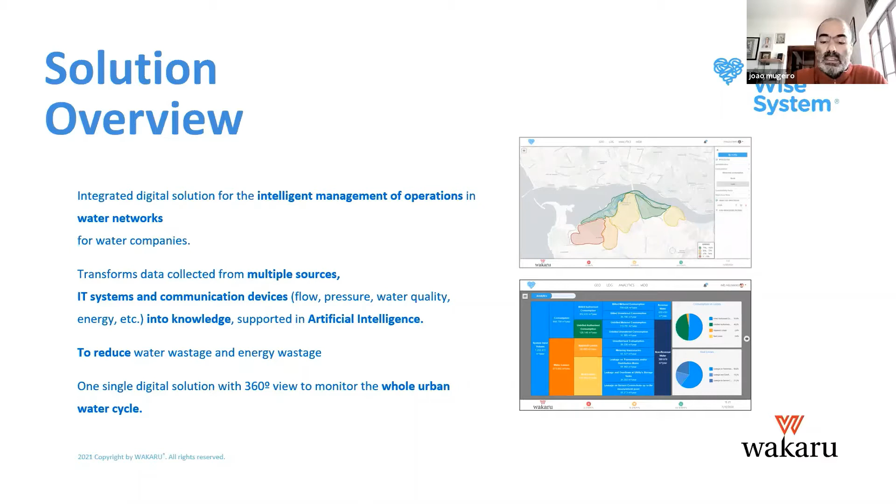Well supported in artificial intelligence, it transforms data into knowledge, generating events and identifying the abnormal ones, giving the water company an integrated vision of the urban water cycle from abstraction up to distribution, and down to the treated water wasted usage, either reuse or delivering it to the environment. Next slide please.

With the water-wise system, water companies will successfully overcome two of five Ofwat challenges. One, responding and adapting to climate change, including how to meet the sector's ambition of net zero emissions, by monitoring energy consumption and equipment's best operation, monitoring the whole urban water cycle.

Sorry, can we go to the previous one? Okay, and understanding long-term operational resilience and infrastructure risks to customers and the environment, finding solutions to mitigate these in sustainable and efficient ways.

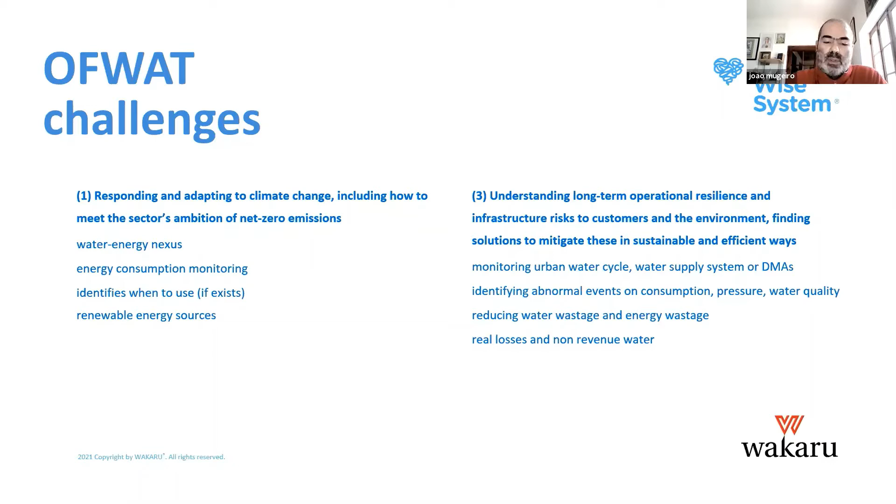And how? Well, by monitoring the whole water urban cycle, identifying abnormal events with predictive models, and reducing leakage, non-revenue water, and extending assets' lifetime. We could go to the next one now, please.

But it's not a single solution, as most of the competition or competitors, but a complete offering. It gives water companies a 360 degree view of the whole urban water cycle. It has probably the broadest scope of the most innovative solutions for water networks management, addressing the water-energy nexus.

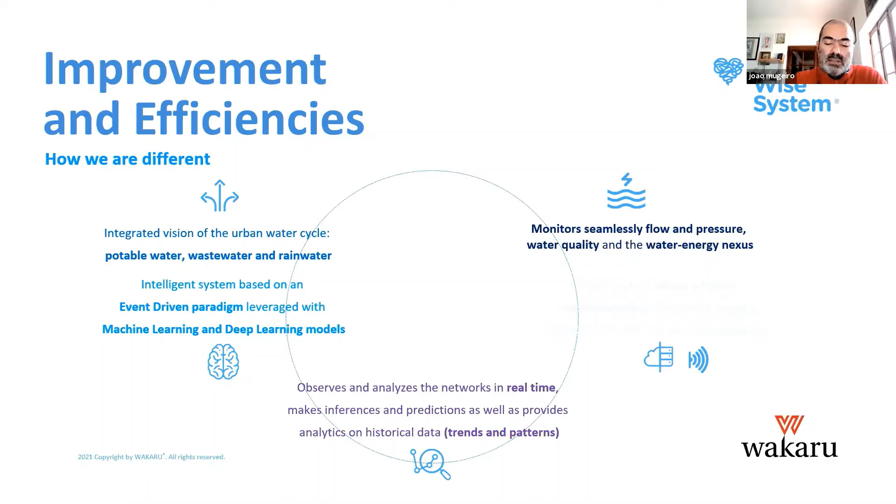Potable water, wastewater, rainwater, flow, pressure, water quality, energy consumption, renewable energies, event-driven artificial intelligence, hybrid implementation, real-time inferences and predictions, better than a Hogwarts wizard. Let's go to the next one.

So this is very important when we are talking, as we've heard this morning from Anglian Water, with a highly regulated sector as it is in England and Wales. And of course, as we are saying, a very important differentiation on this digital solution is the energy consumption, the water-energy nexus. Next slide please.

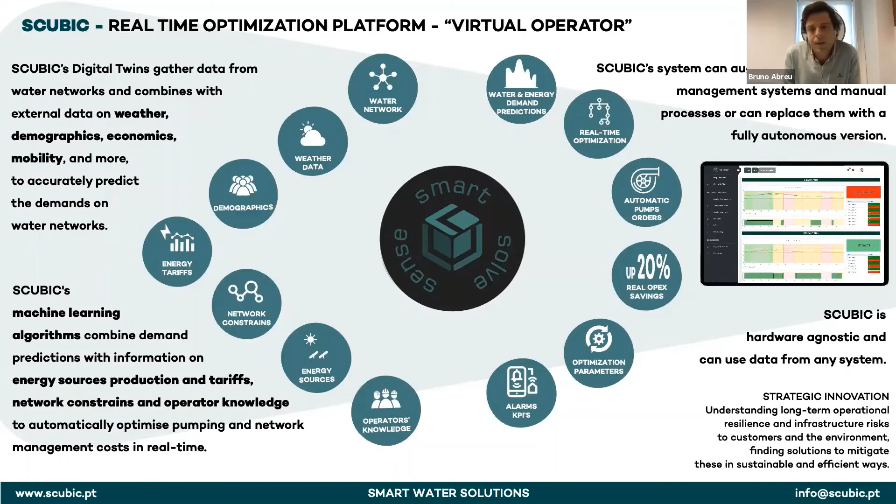So Scubic helps water utilities achieve their zero carbon goals, reduce water and energy wastage, and helps reduce the loss of knowledge due to the aging workforce that is happening all over water utilities in Europe. With Scubic, we increase water quality and network security. And since we lower energy costs and emissions, our platform has a very fast return on investment.

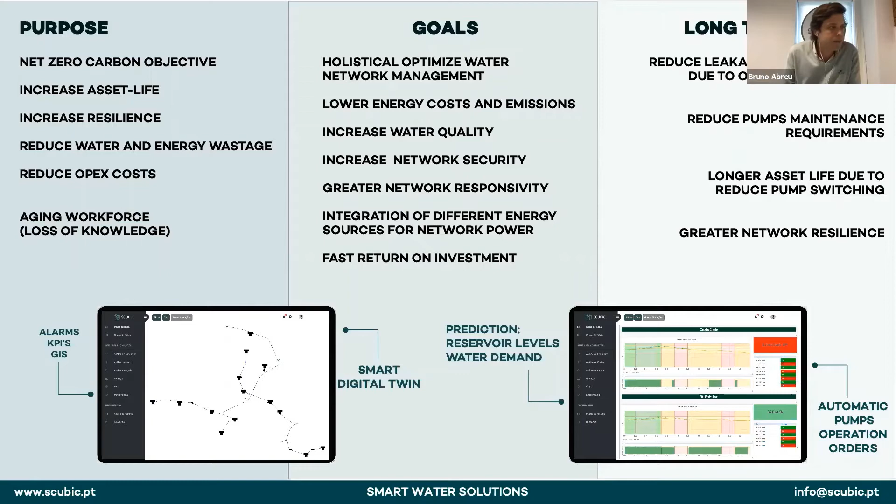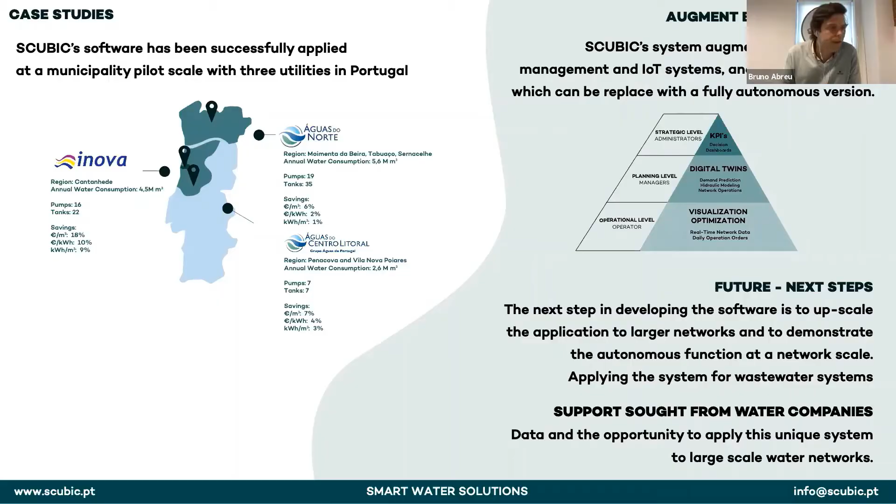So we have applied Scubic on small municipalities, and we are reaching reductions up to 18% on their energy costs, which is really amazing. But I have to stress that Scubic is not an IoT or network management system. Scubic augments these systems, and many manual processes can be replaced with fully autonomous modules. For the near future, we will scale up the Scubic solution for larger water networks and demonstrate the autonomous modules working. Therefore, we are looking for water companies that can give us access to data and apply this unique system at a large scale network. So thank you very much for your attention, and I hope to optimize your network operation very, very soon. Thank you.

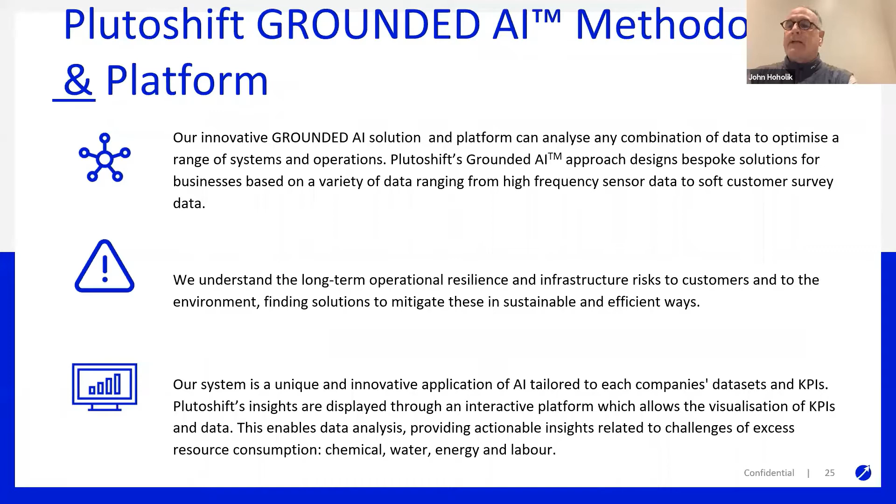Relative to how we can make contributions, it's really in the areas of better data analysis, optimized resources, optimized systems. With our platform and approach, we bring immediate day-to-day value to an organization. We don't try to boil the ocean per se, and really understand the functional aspects of what it takes to operate differently. Within that, we really feel we help drive positive behavior change within an operation to make sure that it actually progresses and achieves its goals.

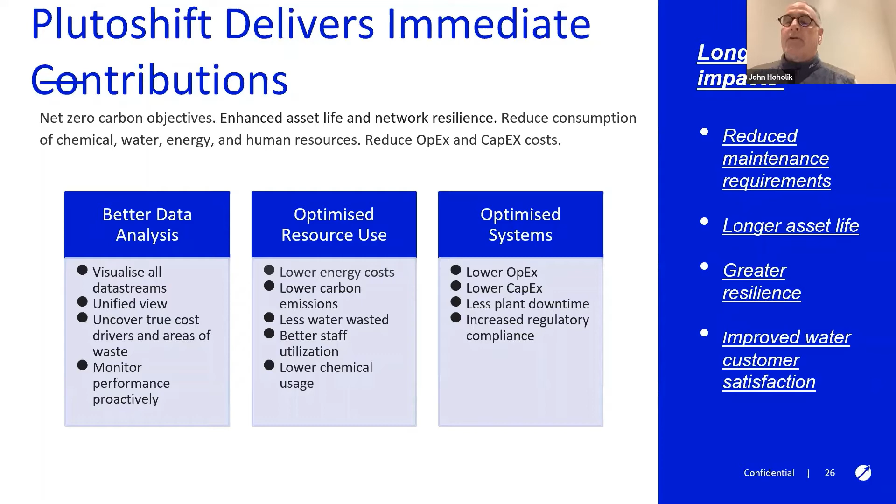When we look at what we do, it's really about the opportunities put forth through this organization on how we can help water utilities make more out of what they do across the various assets and processes. We do have demonstrated results where everything we do is backed by a defined ROI, and within these sample case studies, we're driving impacts that would be of great benefit to a water utility.

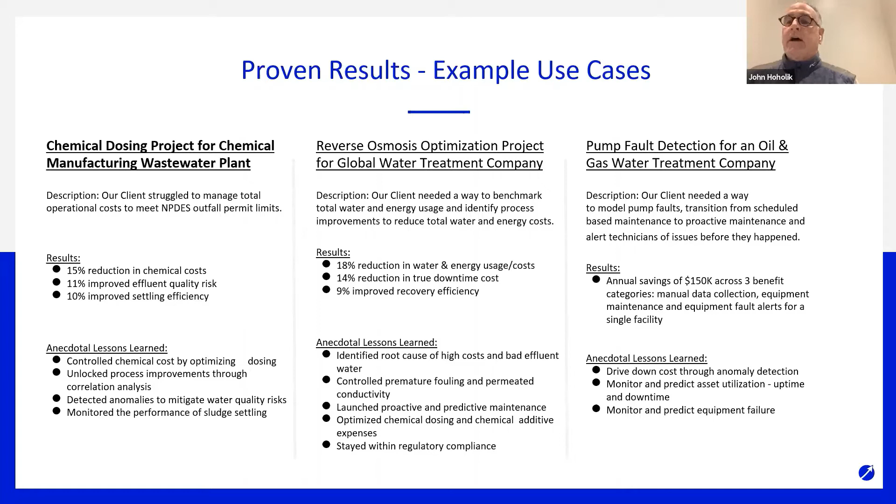Also, I think we're getting a lot of visibility due to our thought leadership on the topic of grounded AI and how to implement it. A little bit more about our market recognition, and then last slide, please.

Really, what we're seeking from a partner is how to holistically assess its business processes. We could really help analyze and optimize existing data investments, improve performance and regulatory compliance, achieve cost and resource efficiencies, and then enhance performance of frontline and remote workers. What we need is access to a water utility from the perspective of gaining their data. Through gaining their data, we're able to come back and provide exact areas that our platform can be of value to them. That's the end of my presentation, thank you very much for the time.

That was great, John, thank you very much, and perfect timing again there. So everybody's doing extremely well. You have already answered the first half of the question that I've asked the other participants today. I think the area that you could perhaps add a little bit more detail to is: if you are able to gain a successful partnership with one of the English or Welsh water companies or NAVs, how would this benefit the development of this solution in particular? Will it help you accelerate the development, accelerate the market entry? What are the specific things that you're hoping to achieve?

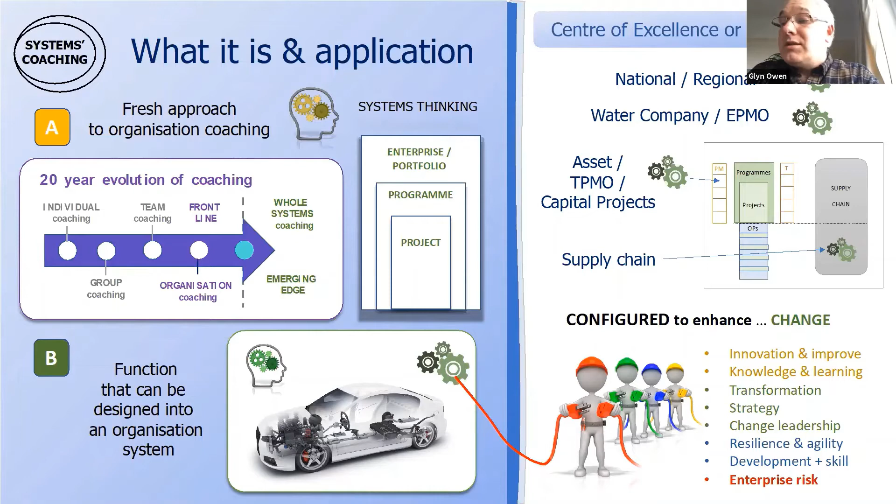So in the world of business, coaching has gained traction over the past 2 decades. Presently, at the emerging edge is a category called whole systems coaching. Systems coaching can be designed into an organisation as a function to enhance performance. In a similar manner, if a car requires more power or speed, a turbocharged system can be installed. Additionally, systems coaching can be configured in to enhance a variety of organisational aspects related to change, development and strategic value. As a function, it can be positioned in a PMO, Centre of Excellence, enterprise department, or even as a whole system network.

So systems coaching developed over 4 stages, each lasting about 5 years. Notably in stage 2, an early prototype achieved finalists at the UK National Business Awards in 2004. It operated within a top 10 contractor with AMP 3 and 4 strategic programmes with many water companies. Stage 3 was outside the sector, focused on whole system transformation. Stage 4 was concerned with a national water company in the Middle East undergoing rapid transformation, and also an award-winning regional integration pilot in the UK public sector. Finally, a book has just been published in December, capturing the blueprint of the approach.

So here's the thing. Matrix organisations are typically designed and best perform in a stable, predictable delivery environment, such as the AMP period of 5 years. However, they typically struggle with change and innovation, and when the environment becomes unstable, the organisational risks intensify considerably.

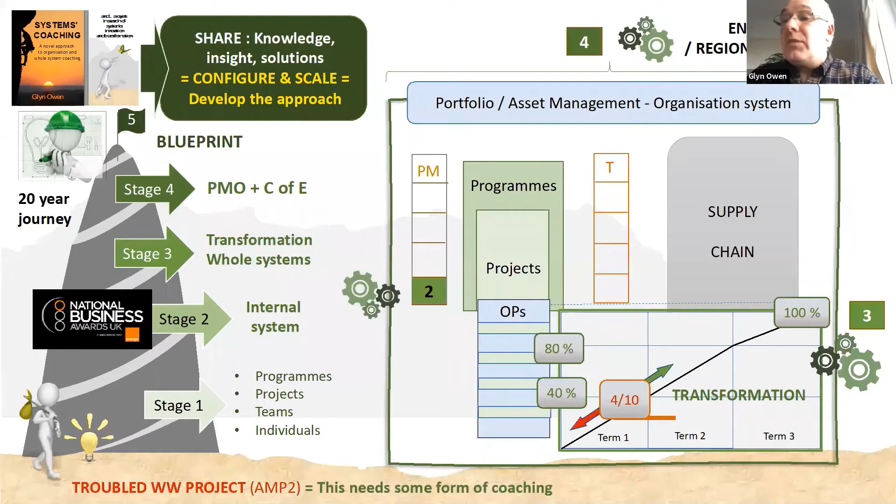So now in a post-COVID environment, as some agencies such as the World Economic Forum are urgently calling for a great economic and social reset, the volatility, uncertainty, complexity and ambiguity of the strategic operating environment is about to intensify. Rapid strategic and systemic pivoting may be the new normal. As an example, perhaps even questioning the viability and priorities of the AMP planning and delivery 5-year programme periods. These sort of issues fall into an enterprise or strategic risk management category that are by nature often difficult to spot and treat. This is because of the people, process, organisation and culture attributes relating to how we perceive and engage with problems and solutions.

Coaching, and in particular systems coaching, speaks to the dynamics and essence of these types of risks. So in summary, systems coaching may be considered as an upgrade for matrix organisations. Organisations that sit at the very foundation or core of a water or engineering-based company, together with the supply chains. My aspiration is to share knowledge, solutions and insights as quick, as wide and with as much impact as possible. I'd be delighted to collaborate with a water company or group of companies interested in leading a scale with impact strategy on behalf of the sector. So thank you for your attention, and if you'd like further information, you can contact me through my website.

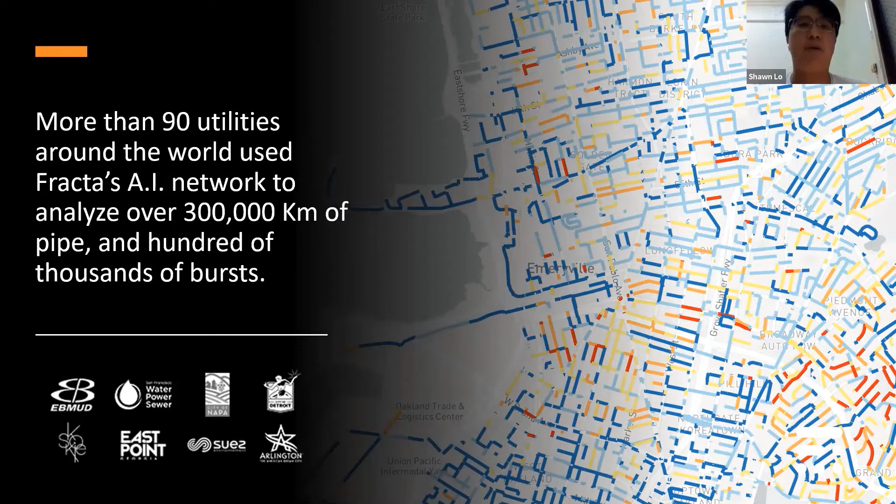Furthermore, our sophisticated data science team knows how to leverage AI across industries, such as wastewater, city gas, and railway. So here is the main part of my pitch today.

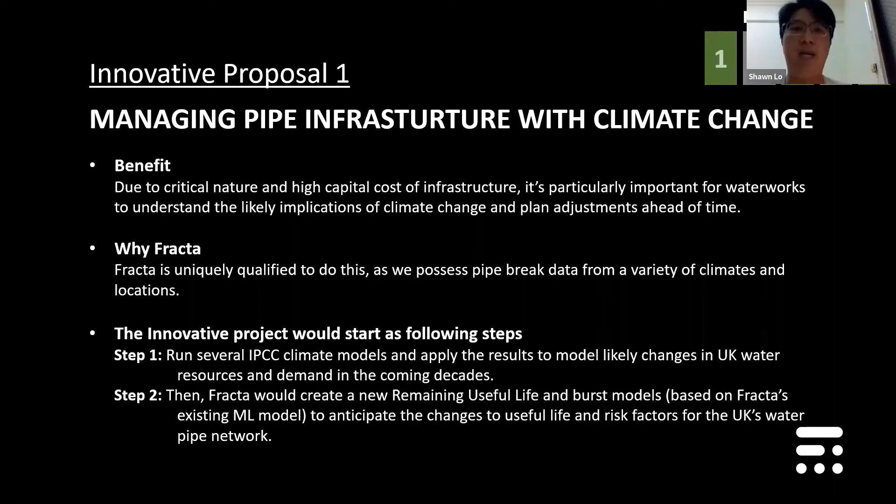Both proposals need your valuable knowledge and data to polish the idea and make the thing come true together. So let's share some details. For the first proposal, we focus on climate change and asset resilience by analyzing and delivering insight from the data, which we believe includes strategic innovation themes number 1, 3, and 5 — please check the upper right index on this slide. This proposal plans to include the IPCC climate change model to predict, first, how weather change will influence the useful life and risk factor for your pipe assets, and second, how to account for the impact of climate change on your capital investment plan. This proposal will benefit your long-term capital investment planning and make you more proactive on climate change.

So this is just two examples of our many proposals. Reach us for more options and details. Next, please.

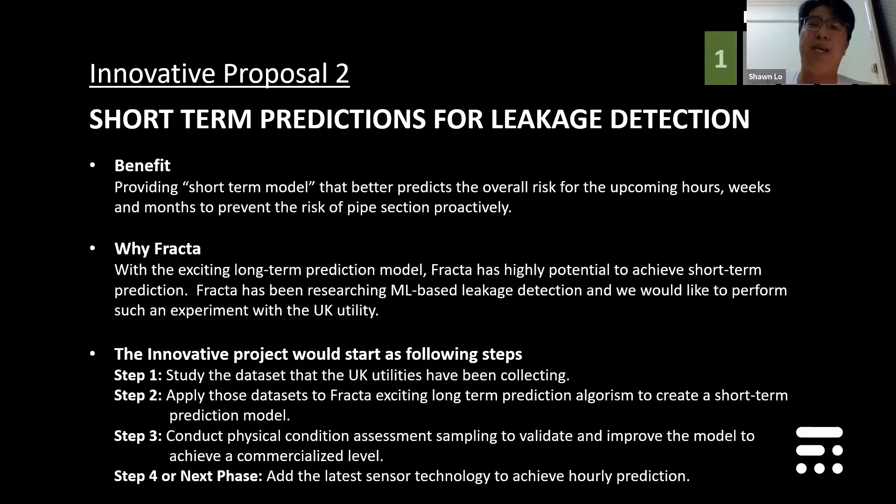So come partner with Fracta.

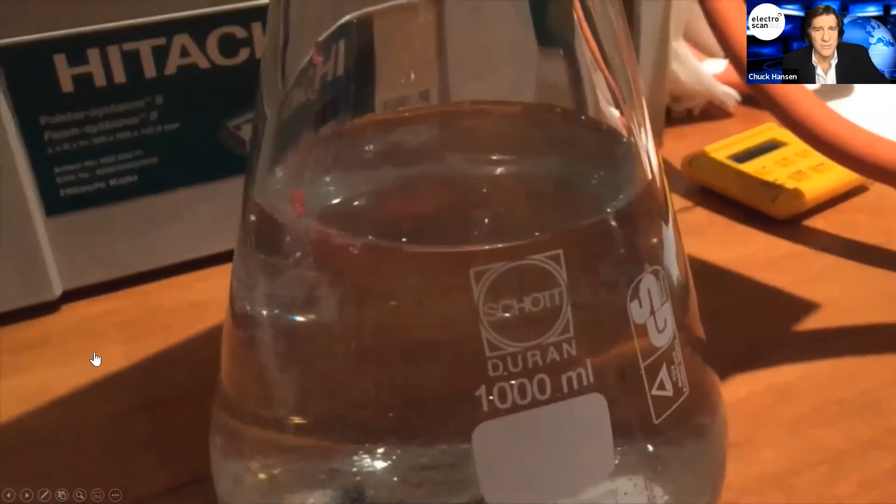Unfortunately, next slide, there's been no technology ever available to measure a full-length liner. And the information actually gets worse. Not only are we finding pipes that are being lined with cured in place pipe leaking, we actually may leak more after rehabilitation because of how we're reconnecting services.

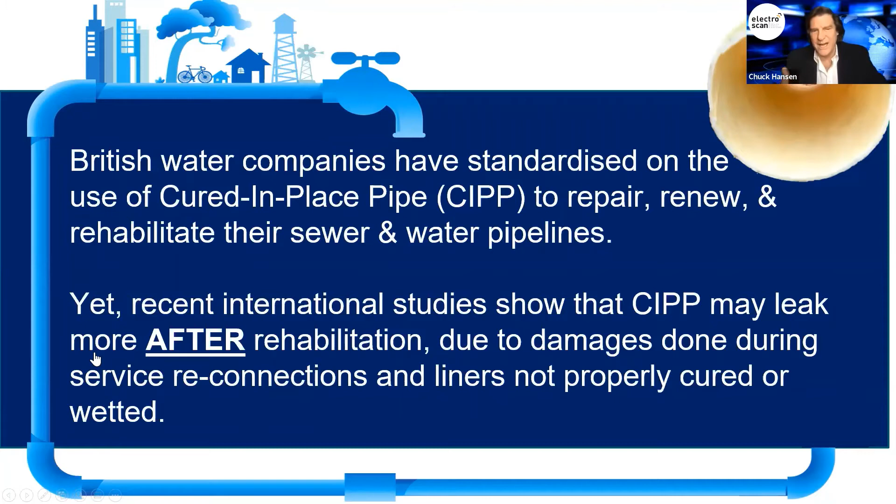Next slide. The examples are all over, and lining contractors really have known this for a long time, but we've given them a very easy technology bar. We've only used CCTV inspection.

Here's a pipe that you can actually see that if I put this through the example as well, I would have full leaks through it. CCTV won't find it. Next slide. Acoustics won't hear it. And even helium tracers won't find it as well.

Here's an example of a UV cured CIPP having cracks that a TV camera or an AI routine looking frame by frame would never see the permeability. Next slide.

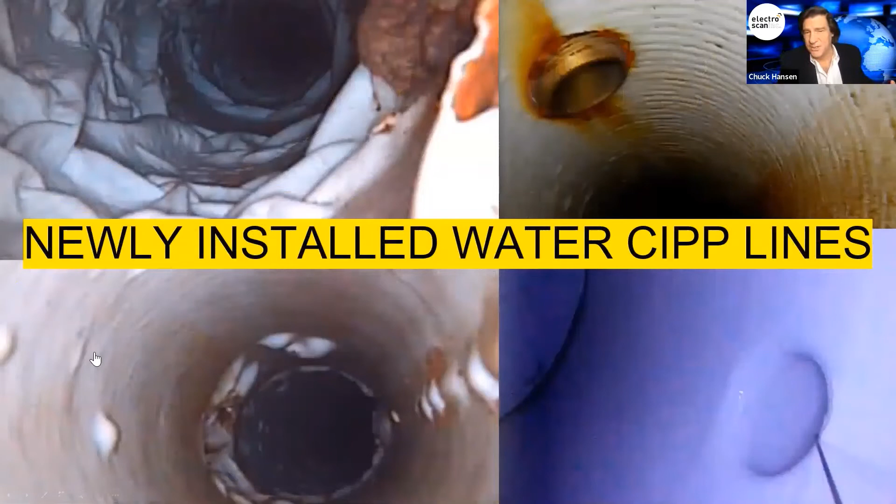The other problem is not only has this been used in the sewer business, we are now finding examples in the UK water market where CIPP is being used to line water pipes. And not only do they look bad, but we're finding massive leakage. Next slide.

It's the perfect storm, because when we assume that we fix a pipe, we assume we're not going to have the infiltration, not have the backups, not have the flooding in homes in recently lined areas in the UK. Next slide.

So what are we proposing? At the £250,000 mark, we're proposing to examine 25 kilometers of CIPP, having that information organized by supplier, by curing method, comparing it to the original CCTV that approved this pipe before. We want to also look at the flood risk, where we're lining pipes assuming we had 100% reduction in pipe, and we want to help come up with new acceptance standards. Next slide.

Some of you may know we recently won the November Water Dragons event. You see some of the water utilities that were judges. Next slide. Earlier this month, we also were selected as the leak detection solution of the year. Again, not acoustic, not video, and not tracing. Next slide.

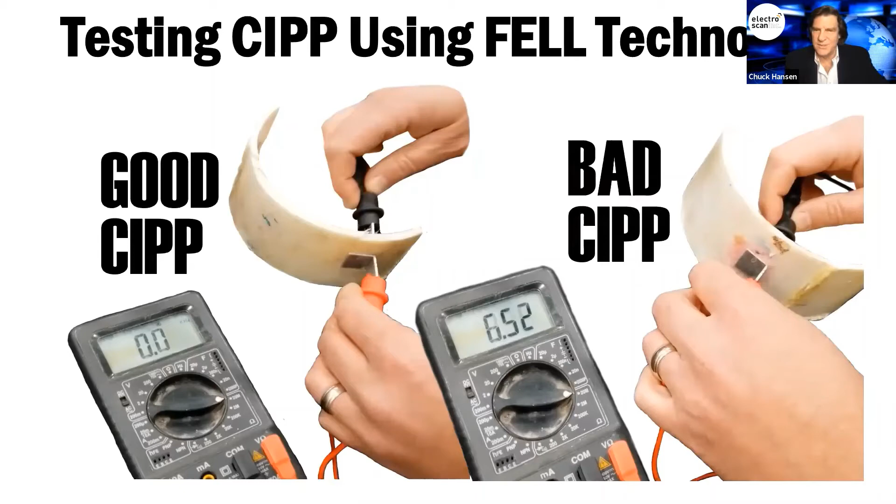So again, helping agencies know good CIPP versus bad, we brought a new technology, and we've been tested by the leading CIPP experts to come and help with that.

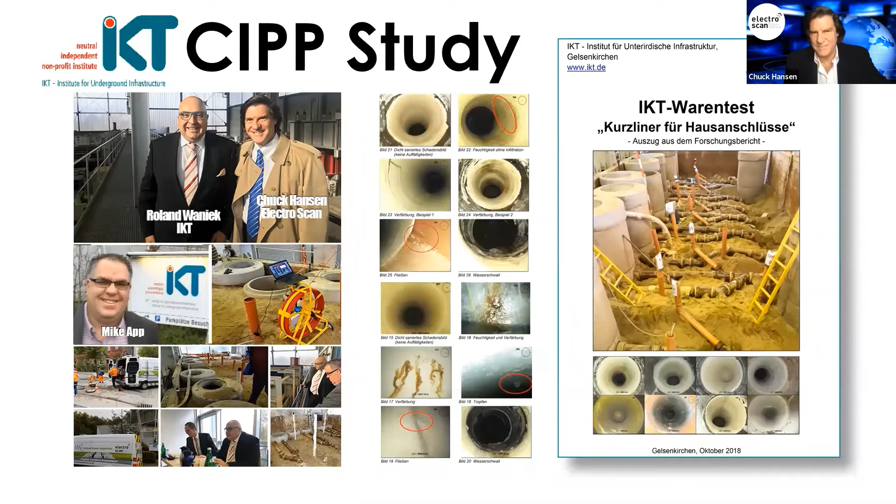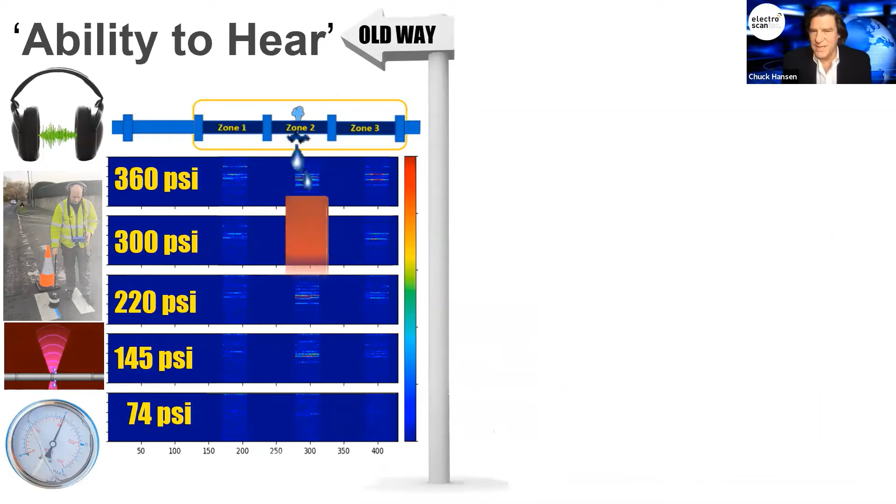So this is the ability to hear. We don't use pressure. What we do instead with our innovative technology, for the first time ever, is we're able to measure the size of holes in pipes.

And the innovative thing is within 5 to 10 minutes, we get that data delivered to the utility so they know exactly where the leak is, positioned to 1 centimeter accuracy.

So I look forward to talking with you and answering any questions you might have.

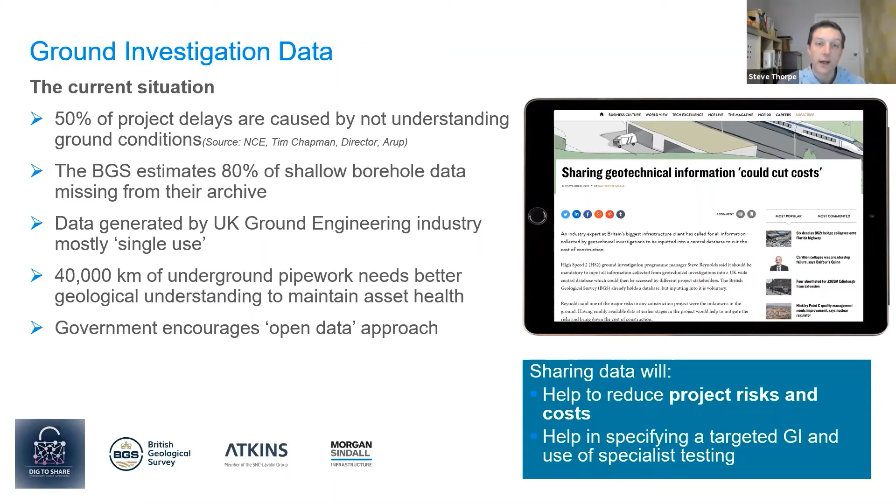The BGS has a national repository of borehole data, which is often used to provide that geological understanding, but we estimate that around 80% of boreholes drilled in the UK are not sent to the BGS for storage. They sit in various organisations' archives as either paper copies or digital files, and therefore are regarded as single use. BGS has strong strategic alliance to the government's open data approach and believes that sharing data can help reduce the risks and produce a more targeted ground investigation.

This is where Dig to Share hopes to help unlock all that data, to make geology better understood and get the information to the people that need it. Dig to Share aims to help create a fully digital workflow from data creation, storage and retrieval. Dig to Share understands many barriers to sharing your data and aims to

identify what those are in the water sector and find solutions to those barriers. BGS would like data to be donated as open data and in industry standard formats as well, so that's AGS format. This allows retrieval of data to be much easier through things like web viewers, industry software like HoleBASE or Groundhog Desktop, or in fact through any GIS system.

As I've already mentioned, this will help to reduce risks and costs and help design a more targeted ground investigation. The Dig to Share project can help by identifying any blockers and providing solutions for you. We can help look at your current data management processes and see if there's any improvements to your data gathering routines and how you manage that data. The biggest benefit is that we can help you understand the value of ground investigation and the value of sharing data openly, and how that benefits the UK economy as a whole.

We would hope to establish a data sharing agreement at the bare minimum. These exist for many publicly funded infrastructure organisations already, such as the Environment Agency, Highways England, Network Rail, and recently the Welsh Government.

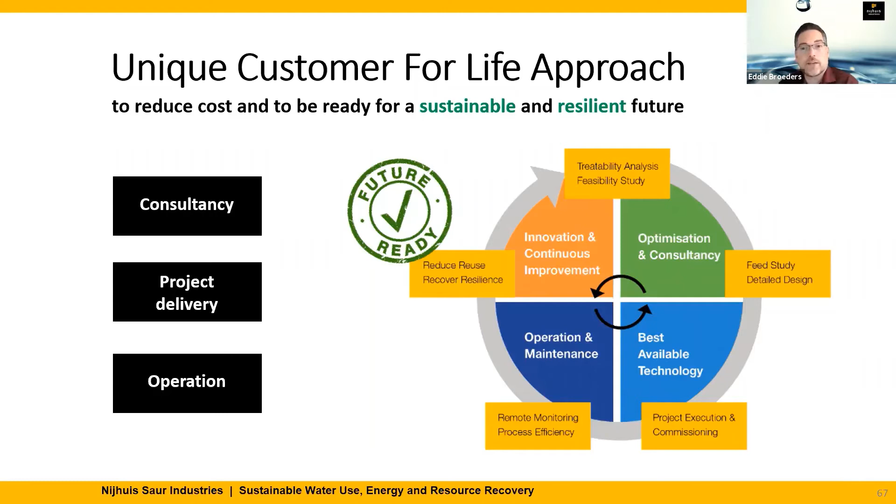Next slide, please. If we look at some technology specifically for pharmaceutical removal, there's much more I could talk about for hours, but ozone is one of the most widely applied technologies here, because it has a very wide variation of pharmaceutical removal. It can remove up to 85% of the load. You can adjust the dosing control to optimize operational costs, and you don't add chemicals in this case. It also leaves more opportunities for reuse of water, for example irrigation water.

There are some options to increase the quality, for example, for recreation water, where you add additional disinfection by UV or peroxide, or to prevent specific compounds to emerge in the water, like at high bromide concentrations, bromate can be formed.

Or in combination with new or already existing sand filtration, to add combined nutrient removal. For example, ozone leaves oxygen in the water, which already provides a lot of oxygen for nitrification in the sand filtration.

Going to much higher qualities, nanofiltration is widely used already in the industrial sector, but in the municipal sector it's more a demonstration stage. More and more plans and pilots are being done in the Netherlands currently, aiming to look for higher quality of reuse, such as process water.

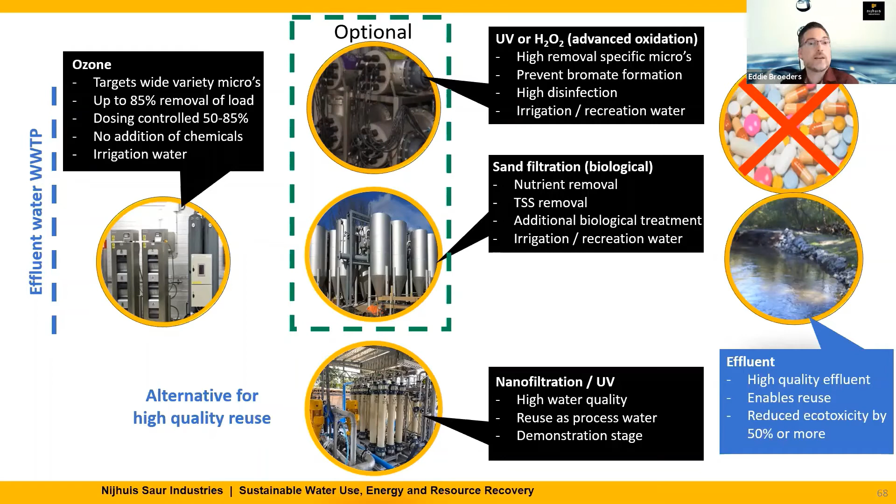Next slide, please. To support all this, one of the things we can contribute to the water companies is that we have extensive knowledge. We have already 5 years of active knowledge from pilots done in the Netherlands, but also countries around it, together with a lot of companies and water companies in the Netherlands. So there's a huge amount of data sets on a very large variety of pharmaceutical compounds and different process setups.

We already have pilots available, and it's something we know how this process has been performed in the Netherlands. Although the UK is different, of course, it doesn't mean you have to reinvent the wheel on every aspect. So this is what we can provide, and also the knowledge across different sectors like pharmaceutical or hospitals.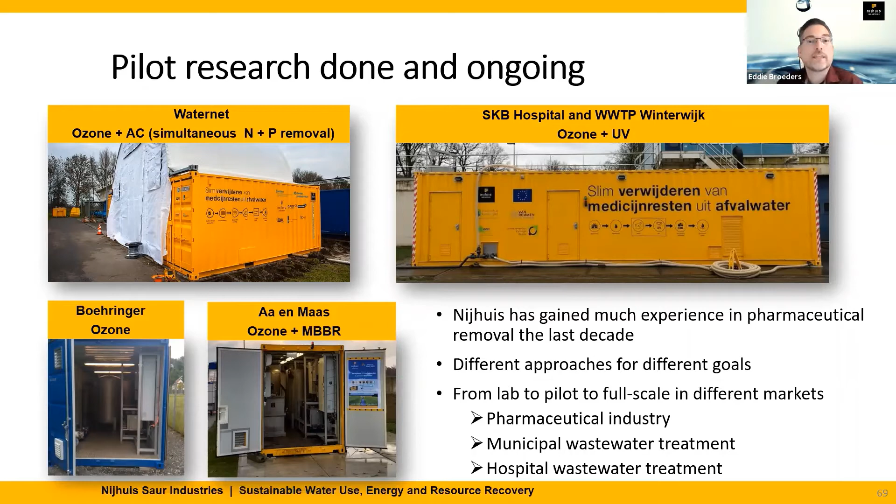Next slide, please. I'm going towards the end. This all results in the first full-scale ozone plant on municipal wastewater treatment. It will be built at the end of this year. It's for 85,000 PE, and we also look for more improvements.

Ozone is a concept that is already applied in Switzerland and Germany for a decade, but mostly based also on the knowledge from drinking water applications. In the decade, innovations have evolved, so we are talking about a newer generation with more online real-time dosing, for example, and more modular builds.

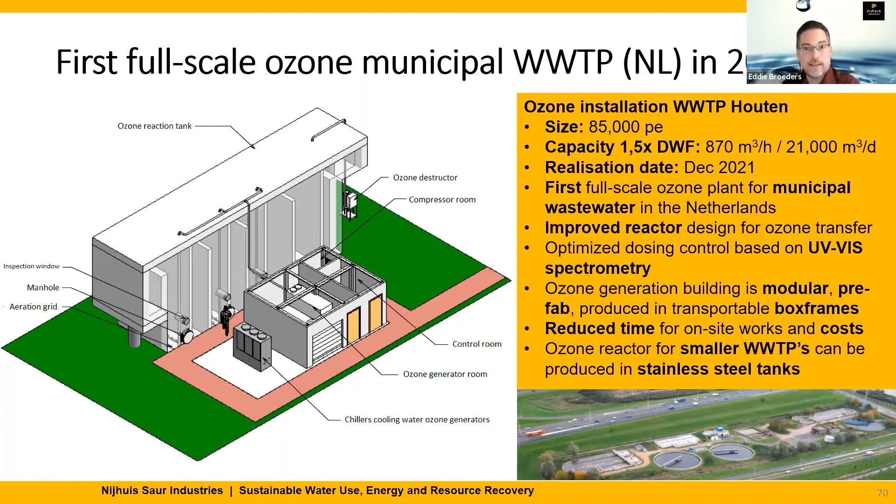Please, the next slide. That's the final one. If we look at modular builds, it has also a lot of benefits. For one, you can build it in the factory, so it reduces a lot of people on site and temporary facilities on site, building time reduced, and cost, of course.

For example, in this case, at the pharmaceutical company, we only built this whole installation in 6 months because the civil works and mechanical works could almost start simultaneously.

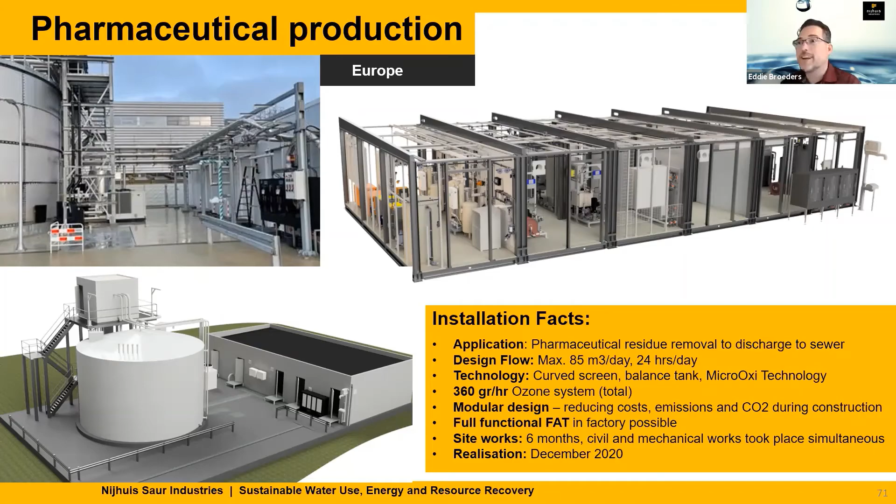Yeah, I think that's about the time I had, correct? It is, yes, thank you very much. Another really good presentation, thank you very much.

And as with everybody else, could you just expand a little bit, please, on what you would like from a partnership with a water company in England or Wales, or with a NAV, and how this would benefit the development of the solution you've proposed today?

Yeah, we see, especially in the Netherlands, this is a development that has been running for some time. In the UK, you have more specific demands, or a different infrastructure, always nuances. So what we could do is use our large variety of technology and knowledge to look together with the water company at their situation, because it's not a one size fits all in this market, to look at the best solutions, and we can support that with already available pilots, and build on that.

Super, that's great. Thank you very much, Eddie. All right, my pleasure. Okay, now next we will move to Jose from Bunt Planet.

Again, I hope I've pronounced your name correctly there, apologies if not. Are you there, Jose? Yes, can you hear me now? We can, it's very quiet, but we can just hear you. Can you hear me now? Oh yes, now yes, okay. Can you hear me? Yeah, we can hear you just about. It is quiet, so if you could speak up, that would be great. I'll hand over to you.

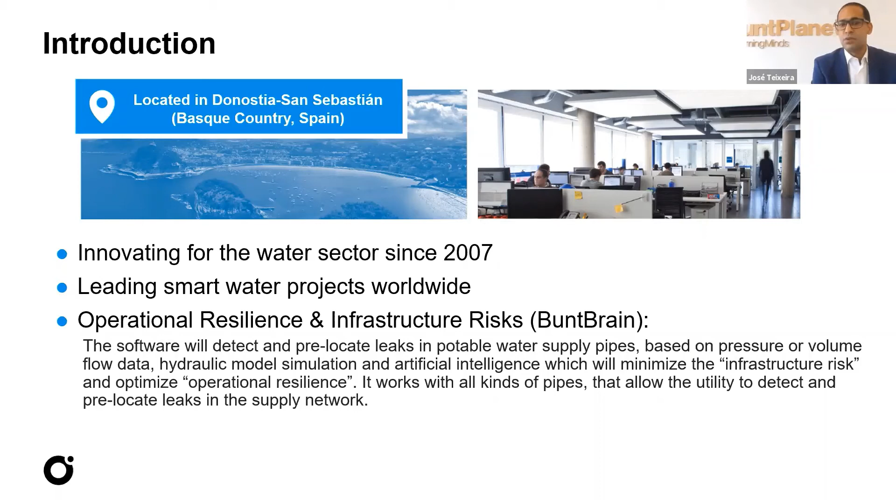We've been innovating for the water sector since 2007, delivering smart water projects worldwide. We now work in 12 countries, and the key goal is operational resilience and infrastructure risk management. We have a platform called BuntBrain that can detect and pre-locate leaks in potable water supply pipes.

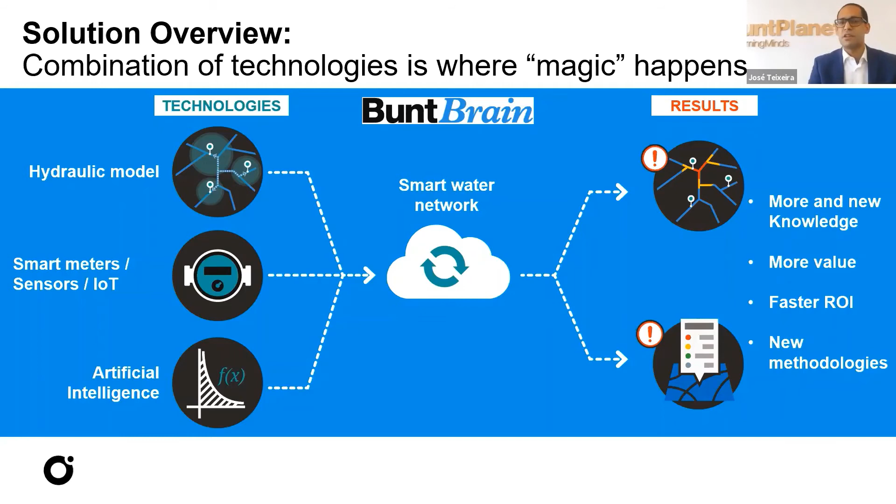What we do is combine different technologies, and that's where the real magic happens. If you use the different technologies separately, you can extract some value from them, but if you mix them, that's where you can really extract value. We use a hydraulic model to build a digital twin, combined with all the information from the sensors installed in your network, and artificial intelligence to manage that data. All that information comes into a single platform called BuntBrain that manages it to give us results.

The big challenge in leak detection is time. First, we need awareness, and we have to reduce that awareness time so we can act in real time, locate the leak in the network, and then do the repair. If we reduce this time, we automatically reduce the costs associated with those leak events.

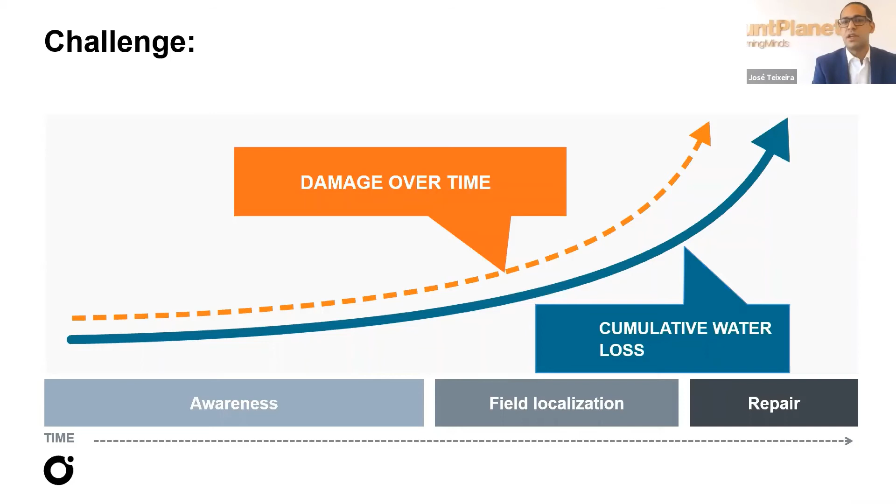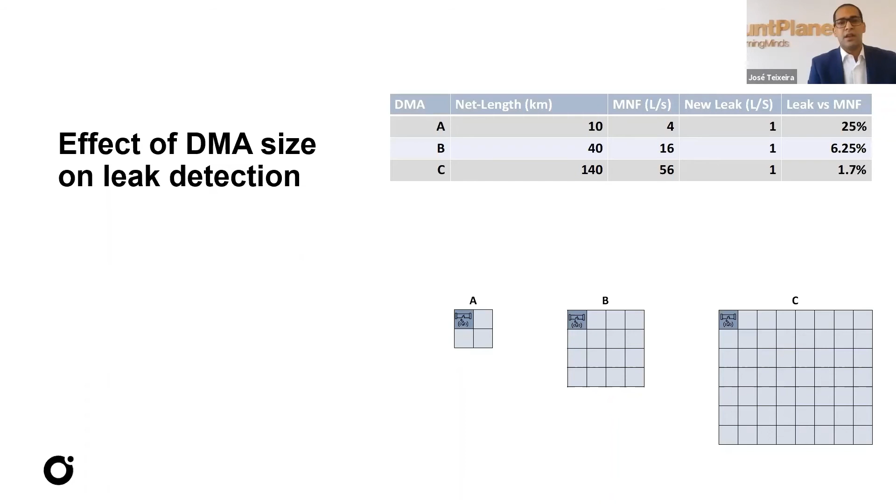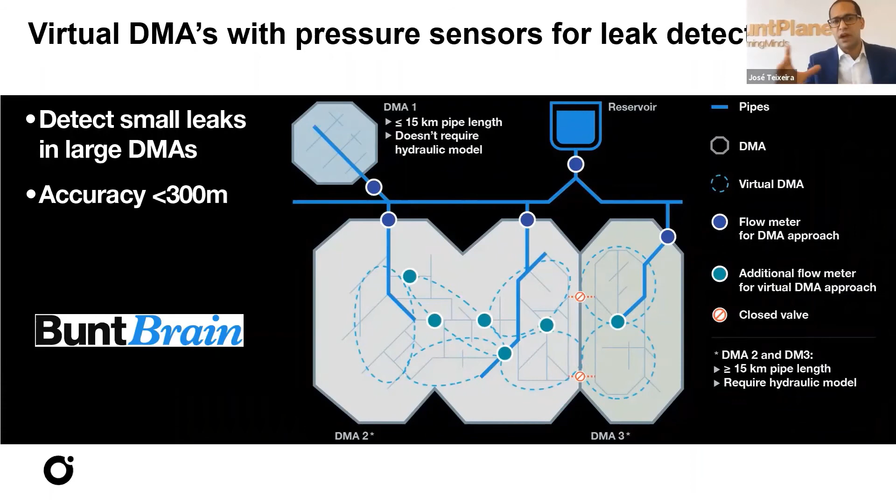Here's how we do it. When we have big DMAs, like DMA2, we use a hydraulic model first, which has to be dynamically calibrated, and then combine that with information from the sensors. As you can see in DMA2, we have 5 flow meters installed in this large area. With this mix of hydraulic model, artificial intelligence and machine learning, which we use to learn how the sensors will be affected by leaks, we're able to generate this virtual DMA and find leaks with an accuracy radius of around 300 meters, for example.

When you have a leak in the DMA, current technologies will tell you the leak is somewhere in the DMA area. But we can do it more efficiently. With the virtual DMA approach, we go down to the pipe level, so we can tell you exactly which pipe to check to find the leak.

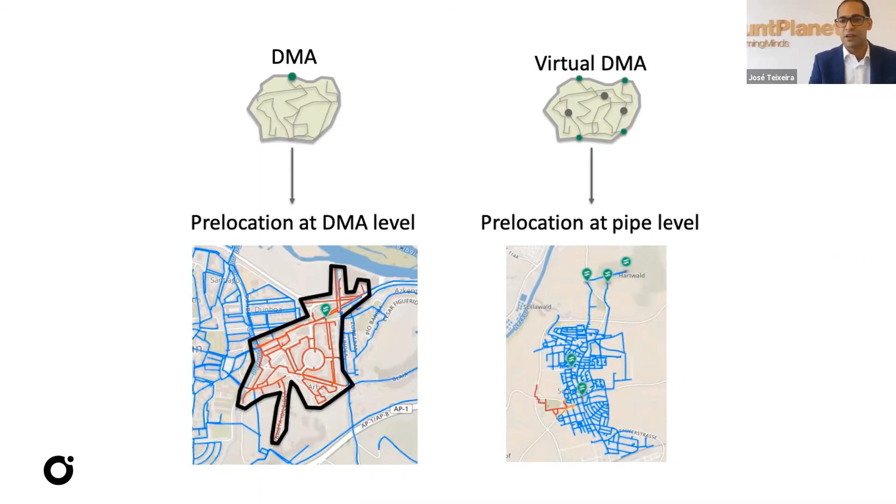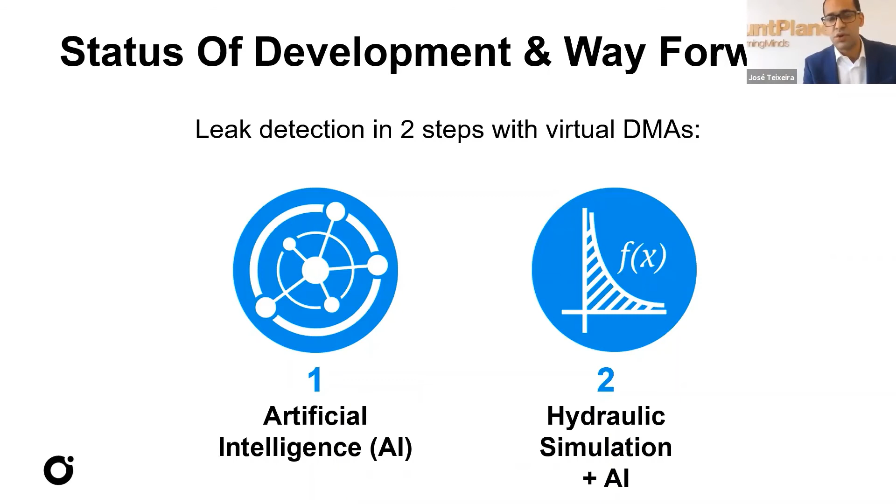First we use artificial intelligence, then combine it with hydraulic simulation and artificial intelligence. This is how we can see a leak event on the platform, using flow meters for this.

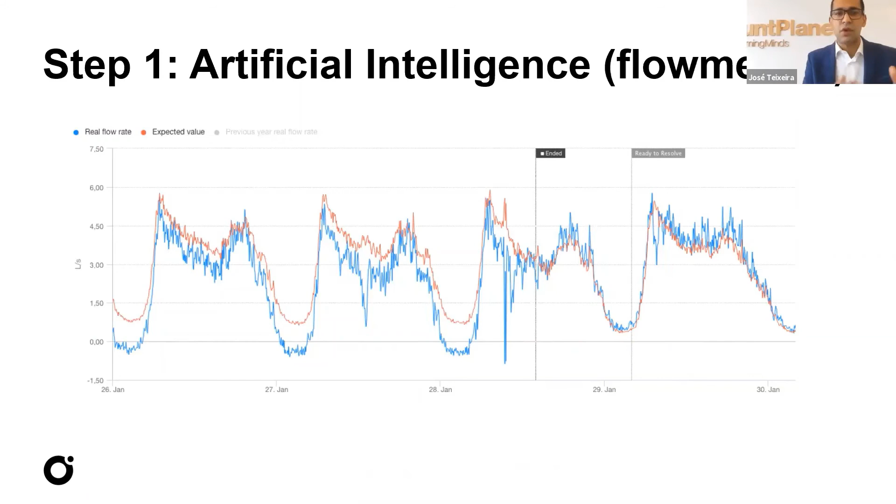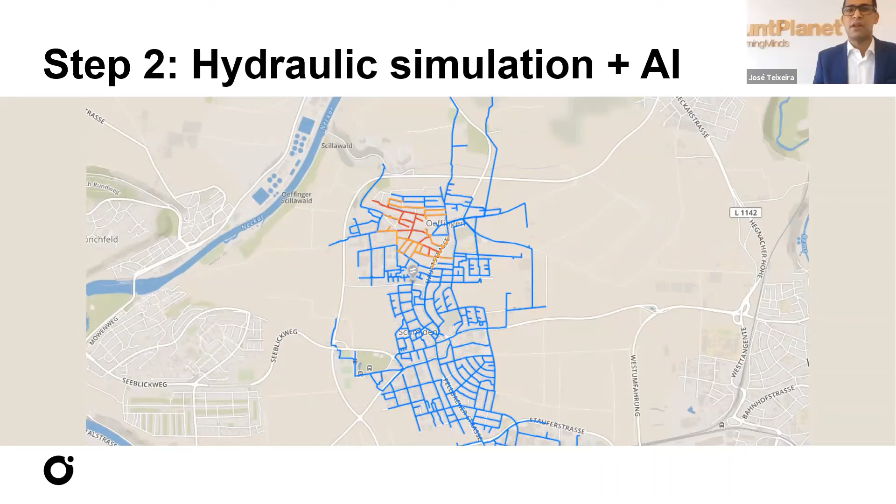To finish, for this competition, we believe we have a lot of knowledge in this field through our BuntBrain implementation in more than 12 countries. But we don't want to come here with flow meters and just repeat what we've already been doing for years. So we want to do it with pressure sensors instead, because there's a drastic reduction in costs when comparing pressure sensors with flow meters. We're already running projects in 2 countries using pressure sensors.

What do we support for the client? Data preparation, because what we need is the data, then hydraulic model calibration, which we can do together with the client, and then the additional sensors that have to be installed in the network in order to generate these leak events on the platform.

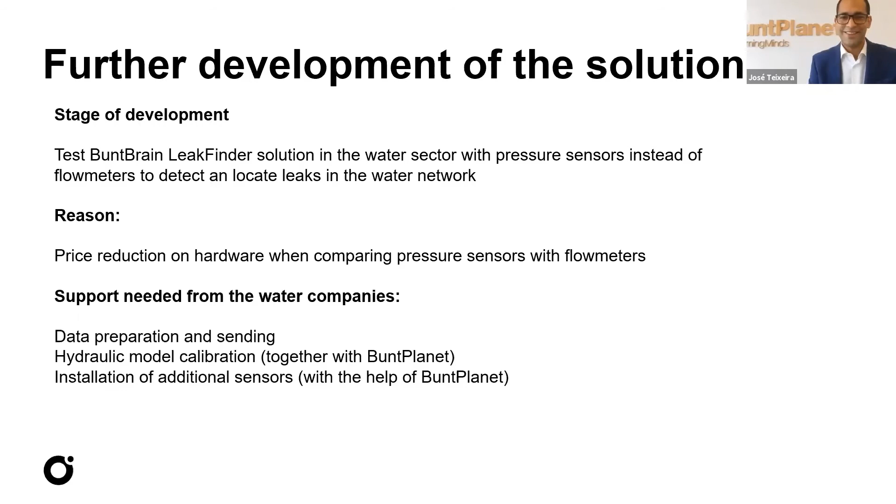Thank you very much for your attention. I really hope this is very good for all the utilities in UK and around the globe. And I want to tell you that we want to do this collaboration with some utilities in UK, and we are open to hear something from them. Thank you very much. That's super.

Thank you very much, Jose. Again, just to ask you if you could expand a little bit on what you would exactly like from a partnership with a water company in England or Wales, and how that would benefit the development of this solution. Perfect, thank you.

Since 2007, we are working with clients. All our innovation projects always have the clients at the center of these innovations. We love to work with clients and to build projects together, and this is a good opportunity for that. We have a platform that has recognition in different countries, and we want to do this, as I told before, with flow meters and pressure sensors. We think this is a very innovative project, because we have a lot of knowledge in the water sector and a lot of information from different projects we already made. We can use all this information together with the knowledge from the client to really build a very good platform that can help the planet stay more sustainable.

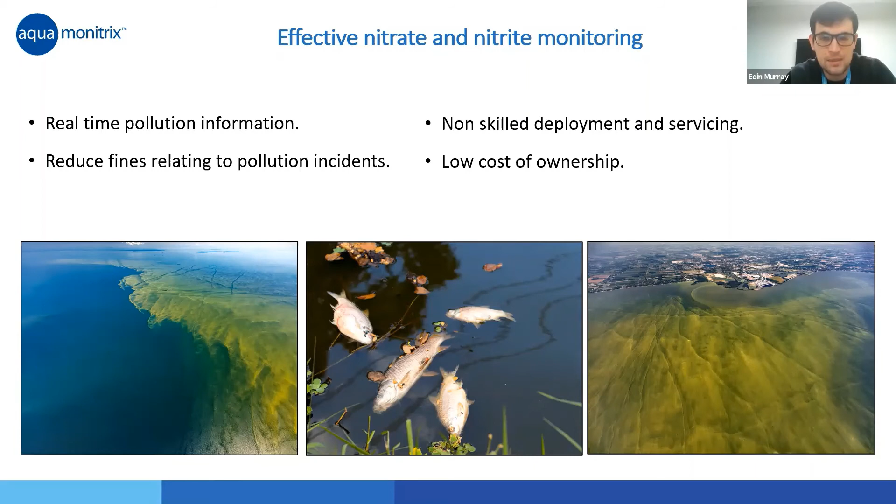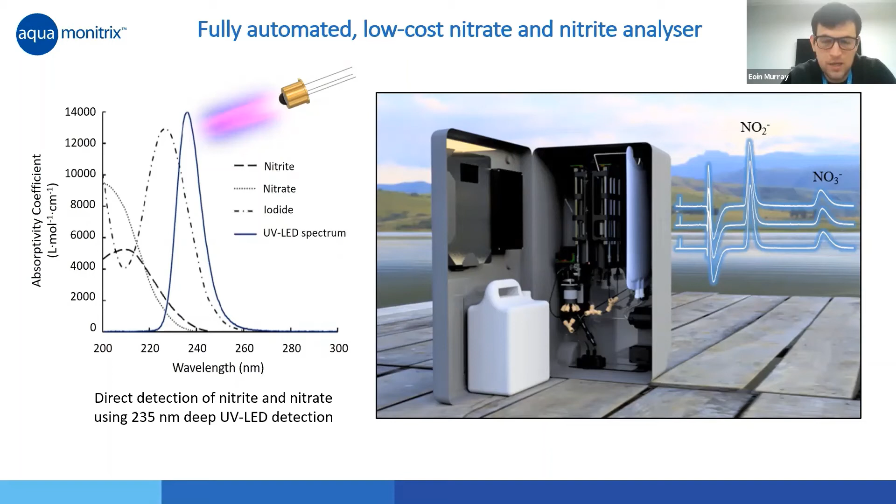In terms of how the analyzer works, it's based on a rapid ion chromatography technique in combination with a new 235 nanometer deep UV LED, and that allows for selective detection of nitrite and nitrate. We have patented technology around this detector, but basically it allows for rapid selective detection of nitrite and nitrate, and in the image here you can see typical chromatograms generated by the analyzer within 3 minutes, and from these chromatograms concentration information is sent to the user.

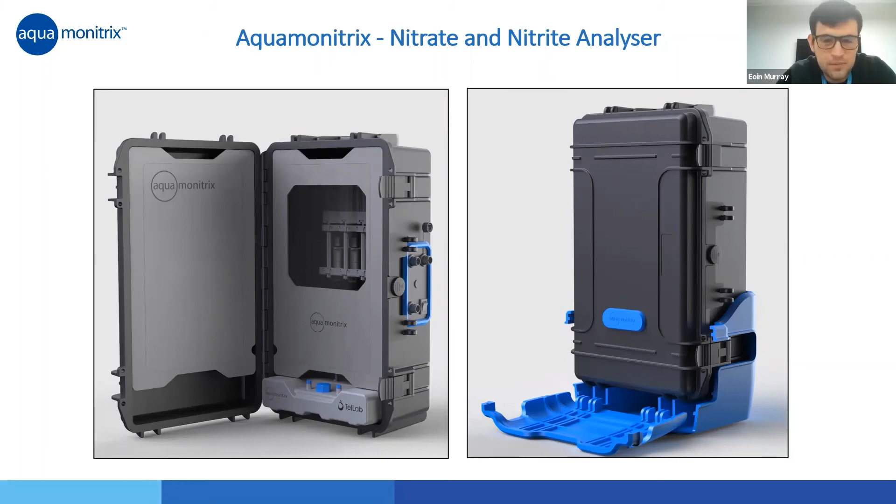So next slide. Here's an image of the commercial analyzer itself, which is commercially available from this month. Next slide. Here are a couple of images — we've tested prototypes of the analyzer in Spain, Finland, Ireland, US, and we had some systems in New Zealand as well. So a whole range of different water matrices, from various wastewaters, industrial waters, environmental fresh waters, and so on — a whole wide variety of different water matrices.

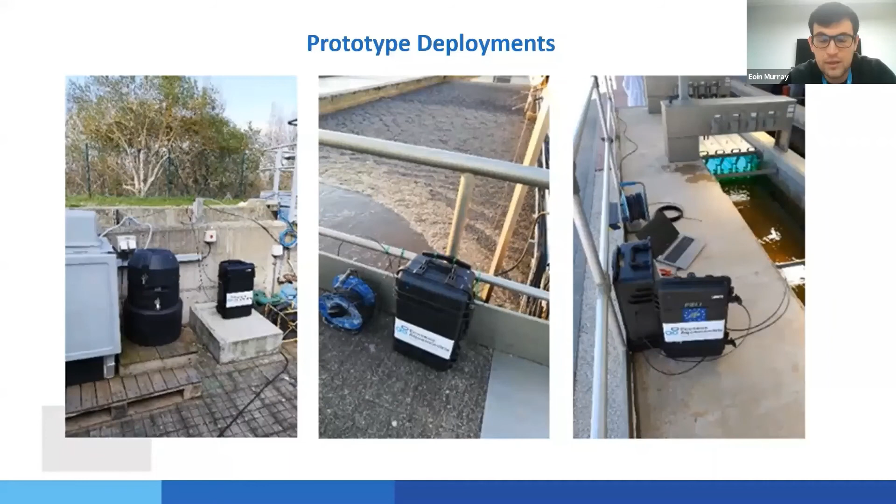Next slide. Just to give you an idea of the analytical performance of the instrument, we were finalists in a US competition, an international competition organized by the US EPA. The challenge was to develop a cost-effective analyzer for real-time monitoring of septic tank waters. Here you can see the results: the nitrate concentrations generated by our analyzer versus accredited lab-based instrumentation, with results generated by the US EPA. Our results are in blue and the grab samples are in red. The left figure is for nitrate, and similarly for nitrite. As you can see, in terms of accuracy, over the 1 month at an hourly frequency, the analyzer achieved 95% accuracy for nitrate and 104% for nitrite, with similarly high levels of precision.

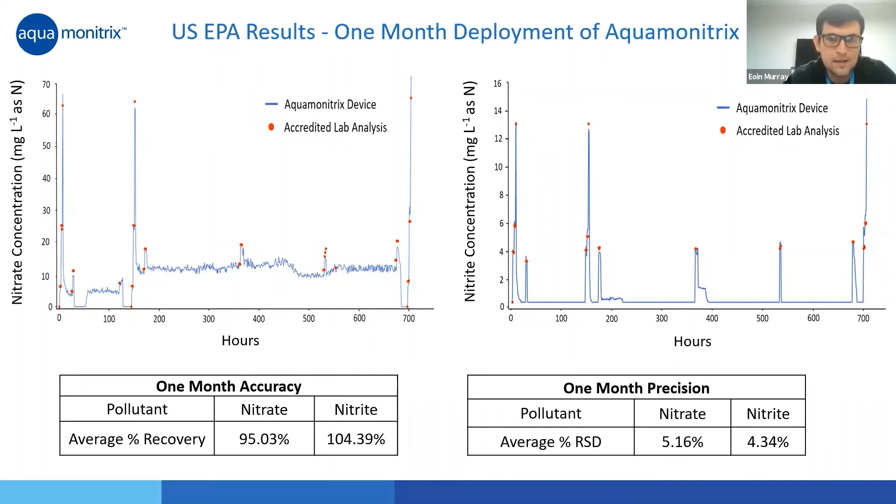Next slide. Here's an example of the user interface for the IoT. You can access the analyzers remotely and see the concentrations in real time, depending on the sample frequency which you set. Next slide.

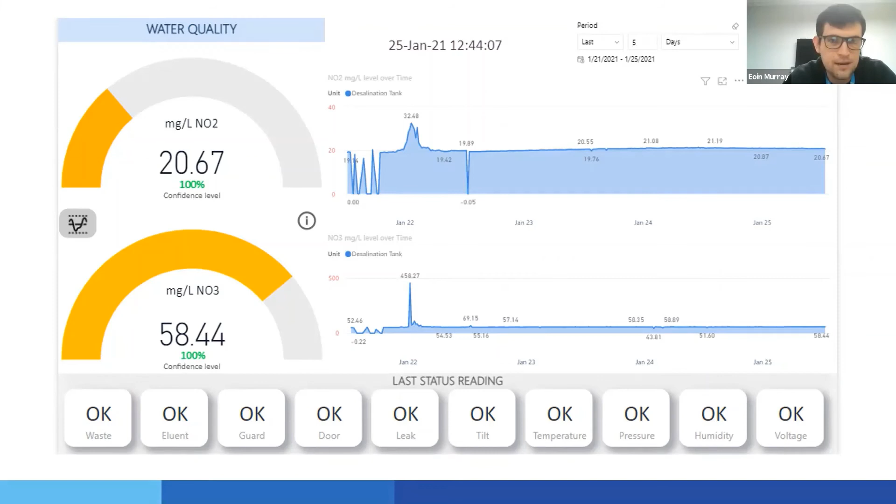So the project which we're looking for collaboration and partners in is basically in the area of nitrite shunt.

Through the use of an analyzer such as this, there's potential to allow for effective nitrite shunt. Various studies carried out by Water New Zealand have demonstrated that employing effective nitrite shunt can achieve a 25% reduction in energy consumption within aeration systems. The objective is to minimize nitrate production by stopping the nitrification process at nitrite, and that's where an in situ real-time analyzer such as this could add value.

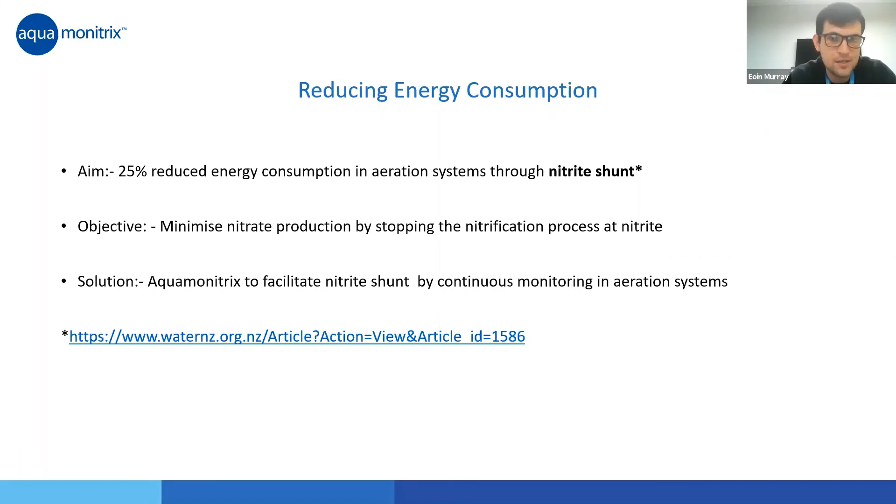So that's one of the projects we're looking for partners on, interested in applying the analyzer in this area. So that's it, thanks very much for your attention. If there are any questions, or you'd like more information on the analyzer or anything at all, feel free to get in contact.

Super, thank you very much, Eoin. As with the others, I'd like to ask you the question around what you would like from a partnership with a water company or a NAV in England or Wales, and how that would benefit the development of this solution moving forwards.

Yes, so a lot of our expertise is in the area of analytical instrumentation, so we would really be grateful for partnerships with anyone with expertise in nitrite shunt or aeration systems in general.

In addition, the analyzer has applications in a wide range of different areas, but that's one of the areas which we think could provide a lot of value in terms of potential energy savings within aeration systems. Again, our area of expertise is on the instrumentation side, and any partners with relevant expertise would be beneficial — we'd be very interested in working with them and collaborating going forward.

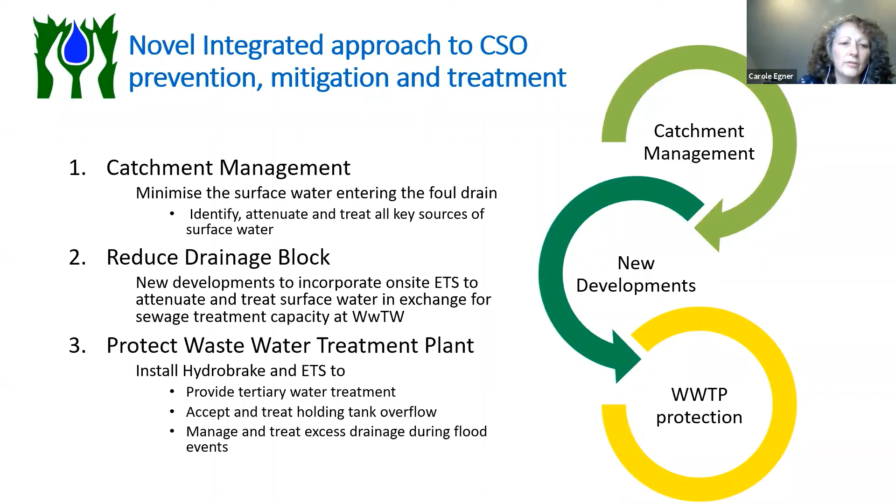The last strand of our strategy is to actually protect the wastewater treatment plant from excessive volumes it's not designed to cope with, and we'll talk through that in more detail as well. Have the next slide, please.

So how do we stop all this surface water from reaching the foul sewer? We're looking at two types of water: excess flood water and rainwater. What Living Water does is look to find where are the sources of this. We look at the water catchment and identify sources of excess water, and rather than let them go to the drains, we want to capture them at source and turn what is a very precious resource into something useful and productive, rather than it becoming a problem in the combined drains.

We've got a number of ways that we would do that. They all involve creating a natural ecosystem, whether through swales or ponds, redesigning straightened waterways, SuDS, and rainwater gardens. What we do is look at the specific location and target a specific solution for that.

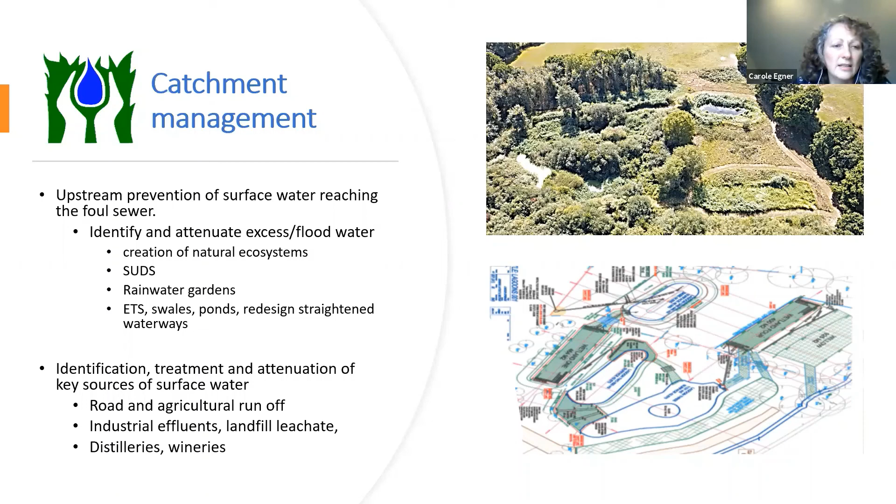In terms of contaminated water, we need to tackle that as well. The more we can reduce that going into the combined drain, the better for the wastewater treatment works. We have a lot of experience treating road and agricultural runoff, industrial effluents, landfill leachate, and a whole variety of effluents. If we treat these at source using ecological means, then that's less water going into the combined drains.

Our system is novel because it's a whole systems approach. Our systems are self-sustaining because we have a very diverse range of plants. They're totally integrated into the local surroundings, which attracts wildlife and microbiology. It's the microbiology that eats all the contaminants and also eats the detritus that comes from the plants, so the systems are self-sustaining.

There's zero waste and no sludge, and they're very low maintenance. Whereas a lot of high-tech solutions are dependent on electricity, our solutions aren't. So they're carbon negative, and they're also completely robust in the event of a power outage.

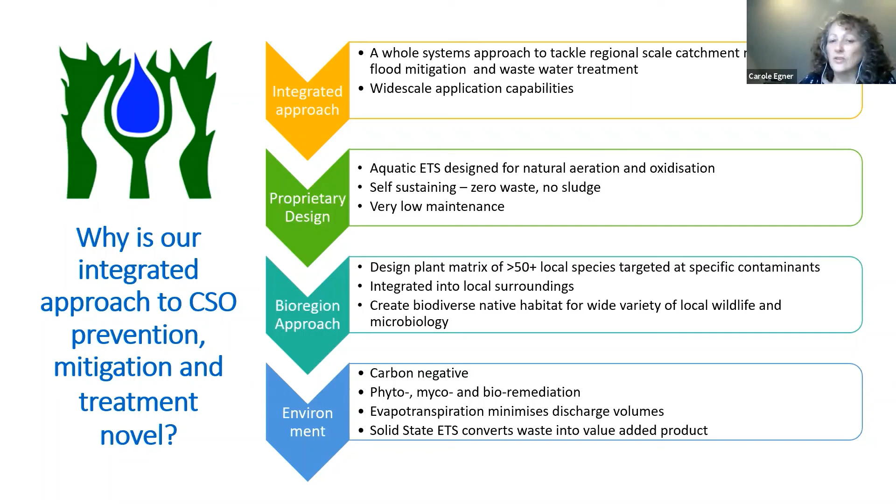The benefits are you eliminate your CSOs because you've reduced the water going into your treatment package, and you've captured any excess and put it through the treatment plant. So you've eliminated CSOs, improved the quality of the water, reduced your emissions, reduced your financial penalties and customer complaints, and your liability because you're not having pollution going out into the environment.

Your costs are significantly lower because our systems are carbon negative. You've increased biodiversity, and where you put in the ecological treatment systems, these are natural, beautiful places and amenities for the public, which can only improve the reputation of the water companies that are putting them in.

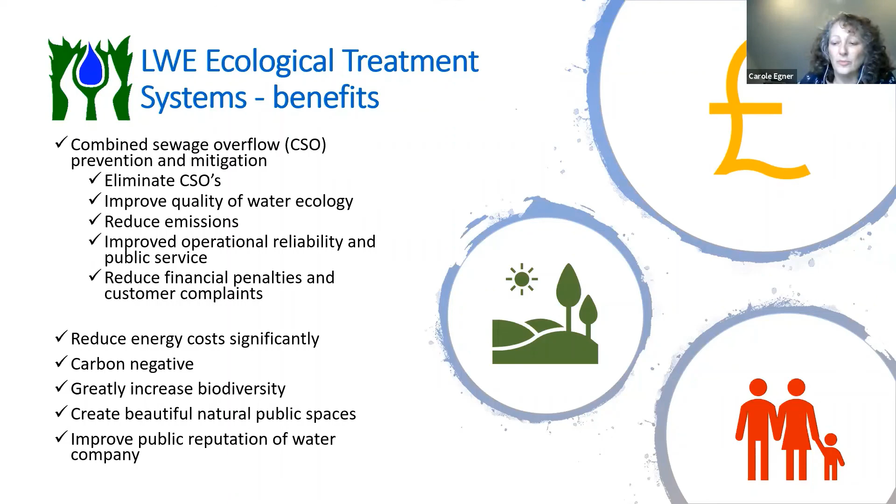We do need to wrap up if possible, please. So for product readiness, we've demonstrated that we've done this before. We've got 32 years of experience, and now we want to work at a bigger scale.

So what are we looking for? Living Water are passionate about tackling pollution and making the world a cleaner place, and we want to work with a water company who's also passionate and committed to tackling CSOs. We want to work with them together to develop an integrated strategy across their entire region to manage water catchment and CSOs. For this particular project, a demonstration is to actually apply all of this to at least one of their sites, wherever they've got the worst case of CSOs, and actually demonstrate that this technology works.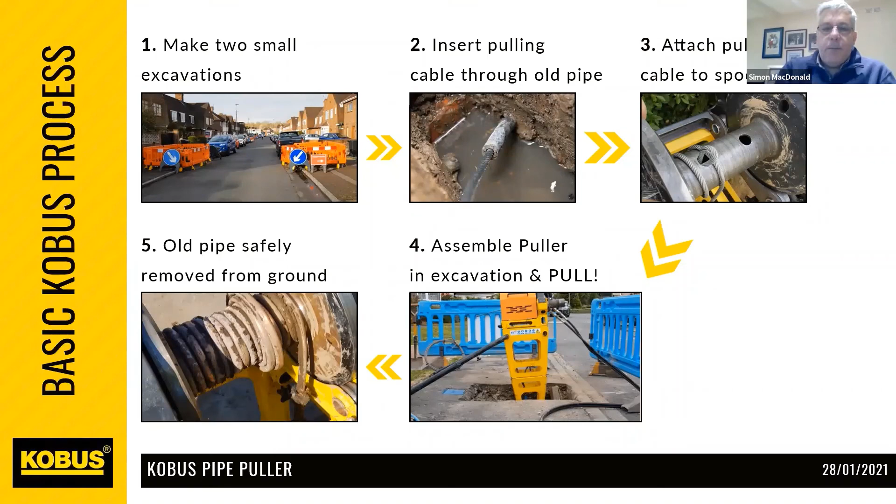In terms of its impact against the well-known stated goals of Ofwat, you can see it's got some significant benefits. First of all, in terms of cost per replacement, typically it can be 70% less than open cut trenching.

In terms of customer disruption, you've already seen it negates the need for road closures, etc., but it also minimizes any downtime for the customer. In terms of on-site emissions, clearly the lack of machinery required versus open cut means there's significantly less on-site emission.

I'd also add on the environmental side, we've probably removed many millions of kilos of lead from the ground, which is also obviously great for the environment. Safety issues and strikes are far less likely in the case of trenchless pipe pulling versus, let's say, moling.

Of course, we significantly reduce underground congestion because we're actually removing the old pipe. Leakage rates are clearly significantly reduced with a new pipe in the ground. And then, of course, the whole wider issue of public disruption, road closures, etc., are extremely well taken care of when it comes to Kobus.

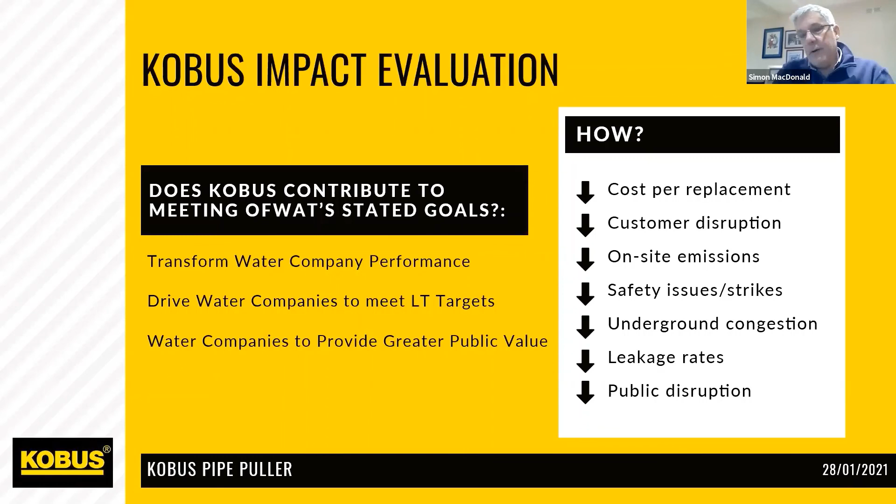So what is the current status and way forward? Well, first of all, our machines are now made in the UK and they're stocked in the UK, so we have inventory, so they're easy to call off.

We're ready to deploy and demo or trial for any water company partners. And I think we've developed a great way of partnering with water companies to foster internal adoption, which we see as one of the key issues in getting take-up of innovation in the industry.

Our objective is pretty simple. If you are conducting a pipe replacement program, then Kobus should at the least be in the toolkit, if not perhaps the go-to tool in the toolkit. So that's our clear objective.

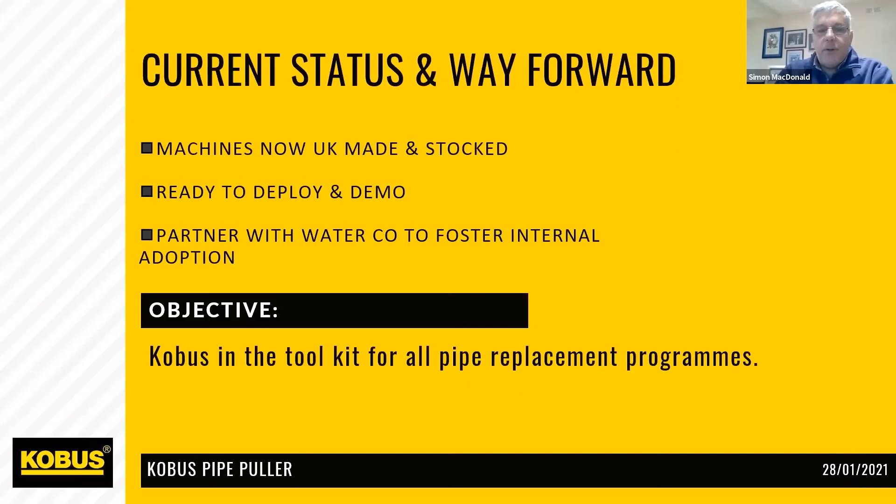So that's it, thank you. That is the Kobus pipe puller. And if you have any questions, I'd be glad to take them.